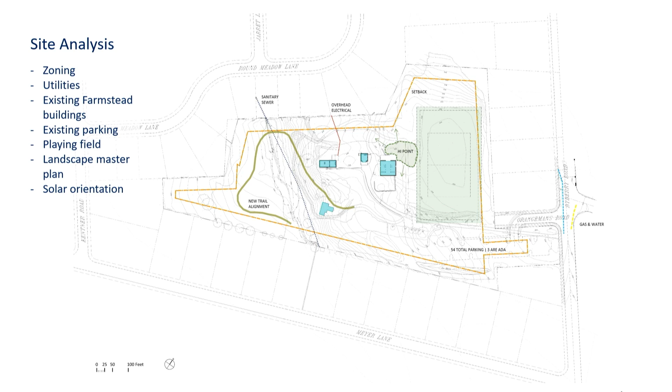The barn is in fair to good condition and can be made usable for flexible programming space. It would, however, require fairly intensive effort to make it fully conditioned and fit out for highly programmed uses. It would also require sensitivity in the fit out so the character is not lost or undermined. So we pose the question: how do we bring the barn online for recreational and community use in a way that works with the project goals and within a reasonable budget?

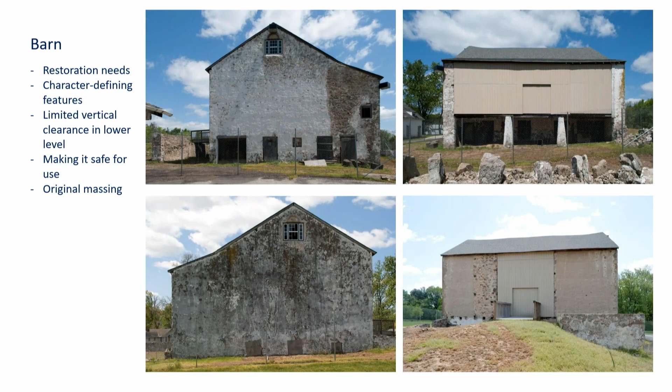The prior removal of what we're calling the north bay of the barn, this section here, means that section of the building is no longer there right now. This provides an interesting opportunity to link the barn with the new construction and to focus on cost-effective and energy-efficient new construction.

Reinterpreting the shape and floor plate of the north bay on two levels will provide approximately 1,600 square feet of new program space and create a sympathetic and compatible design to link the building to new construction.

So the preservation approach is: the barn is very well suited to supplemental community space. Maintaining its historic relationship to grade and the landscape is important to the character not only of the building, but of the whole property. Restoring the prior massing of the north bay, configured for adaptive reuse, will provide program-intensive space for new uses and new programs. It can be fully conditioned for year-round use.

The forebay on the south side of the barn and its relationship to the enclosed outdoor yard is well situated to connect programming both inside and outside the barn. And depending on access and availability to grants for historic buildings, the barn can be restored incrementally using grant opportunities specifically targeted for historic improvements.

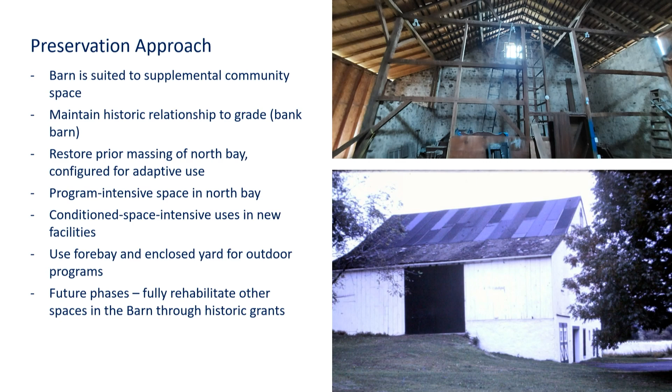As we began to look at siting a new large building on this property, we took cues from the organization of the historic farmstead buildings, with entrances at grade, the setback between the buildings, and the ensemble created between the buildings and the outdoor spaces in those relationships. Generally, the buildings have a perpendicular organization and the entrances face south.

We also want to be able to utilize the site circulation and the accessible parking. And we're also aware of new trail alignment, which will be coming online as part of the master plan.

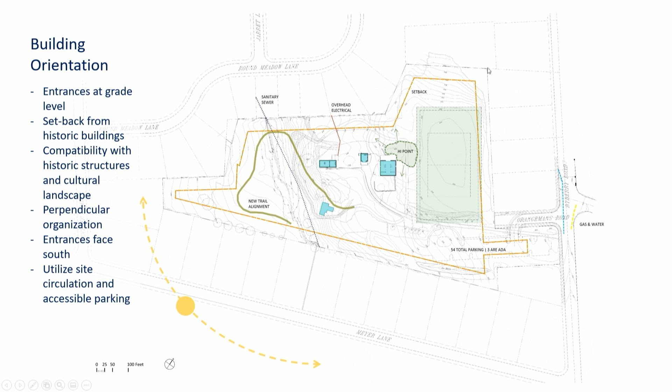So we started by looking at this shape that is approximately the size of a basketball court, first in the east-west orientation, set back. The orange line is the 40-foot setback from the property line.

We didn't pursue this too aggressively, and the reasons for that were: by positioning it within the setback, it begins to intrude on the historic core of the property and crowds the buildings. Also, because it's seated at the high point of the site, it eliminates the landscape relationship of what we call a bank barn. It doesn't work very well with the grades, which all slope down to the west, and the long wall runs parallel to neighboring properties and places unnecessary emphasis on the gymnasium building.

If we rotate that and also set it within the setbacks, it not only stays within the boundary of the setbacks, but also minimizes impact to neighbors.

After adding supporting space requirements to the gymnasium, the arrangement begins to create usable spaces between the buildings: between the gymnasium and the recreation facilities in the barn, between the carriage house and the forebay yard of the barn, and then a direct link to the farmhouse. It also organizes access to all the buildings from a common point located close to the existing parking and accessible parking spaces.

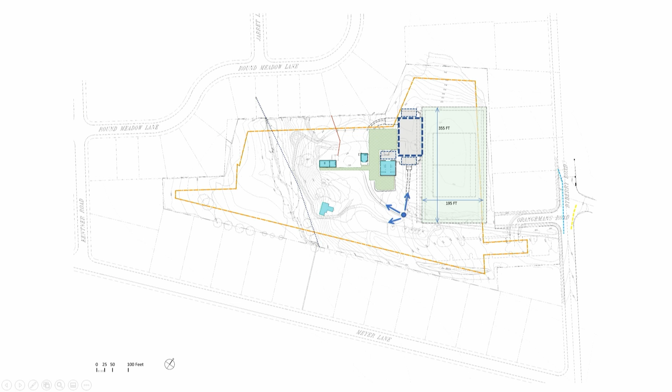The next few slides focus on the program, the uses of the space, their relationship and adjacencies, entrances to the building, massing, relationship of the floor levels to grade, and the heights of the buildings.

The full-size court, 50 feet by 94 feet, served by exits on all four corners, a service from the west, service and mechanical spaces located on the north side.

Linking to what we're calling the North Bay addition of the barn would be an infill building that would have locker and changing restroom facilities, first aid room. And then facing towards the historic properties could be a restroom that could be open even if the rest of the facility is closed to serve the historic property and activities going on.

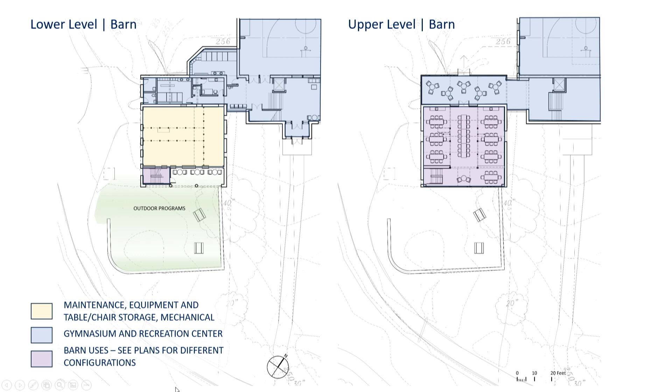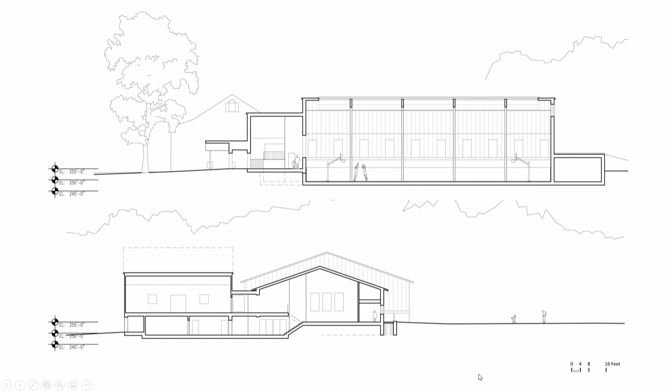Two more views cut through the main space of the barn, looking at the gymnasium. This would be the new construction portion of the barn. And you see here the low clearance that I was speaking of in the lower level. But you get this wonderful relationship of the landscape on the north side through to the program space, down through the forebay of the barn, and out to the outdoor programming space on the south side of the barn.

And then the last section view with the fields on the left, the gymnasium slightly lowered into the landscape, and the barn beyond.

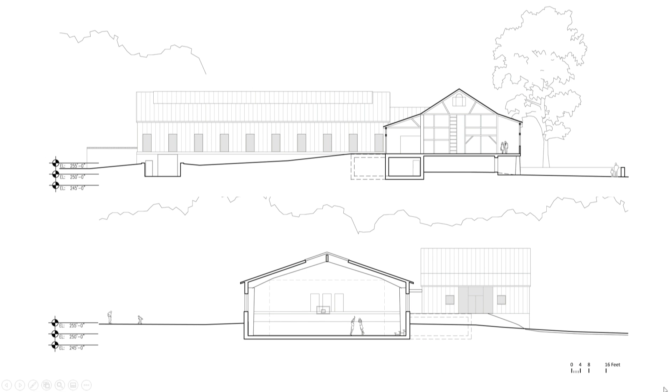And just a few three-dimensional views. Please keep in mind, this is just a study. These are massing models. These are not designs or meant to show exactly how the building would look. But you can see the focus is on trying to create the ensemble of spaces that respects the historic core of the building and makes the large building fit in with the overall scale.

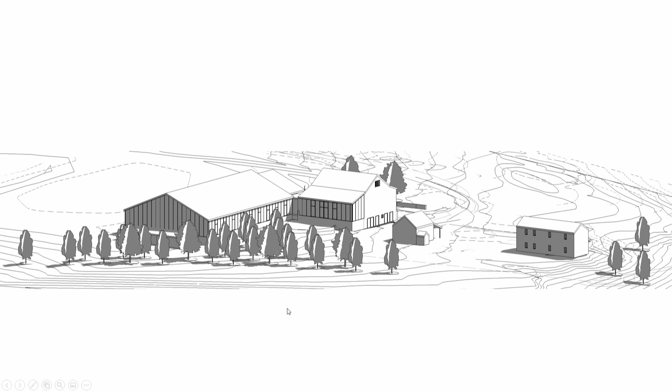Similarly, with the budget, we deferred to the methodology that was used for a similar study, and started with the square foot unit cost for the recreation facility that was used for the Woodlawn Park Master Plan report. But since there have been a great deal of changes with construction costs, the economy, availability of materials, we've really seen prices escalate. I'm sure you're all aware.

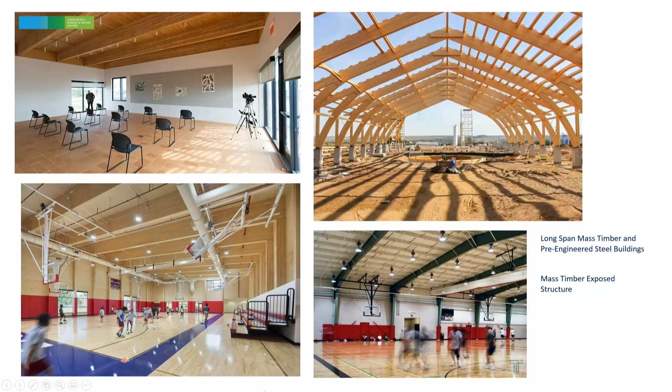Also, in looking at long span options, steel is always an option. However, availability and costs for steel have been pretty volatile. So the other option of looking at wood long span, there's some very desirable aspects of using wood. Availability, cost has gone down, and just the character would be very fitting in this case.

Also looking at panelized wall construction, both opaque and translucent, transparent, to create that kind of scale and texture. One of the nice things about that type of construction is it combines everything in one panel, the insulation, the light, cladding, and could be very cost effective.

Thank you. Comment. Thank you, Claire.

Before we get into questions, if you have any, this report was meant to serve as informational for the Board of Commissioners should they decide in the near future or further down the road if a recreation facility is warranted. This would give you an option as to another possible location as compared to Woodlawn.

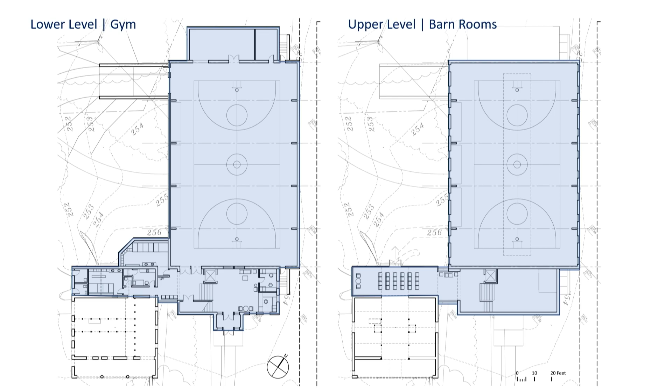That's phase one - everything from the south I would do as phase one. And then the gym, that whole thing, because that's just a double height gym space, there's nothing else to it. And the mechanical space to the north would be solely for the gym, mostly.

So you could isolate that entire facility. I just feel like a gym is a need the community has talked about for a long time, and we are going to have some community rooms at Woodlawn still probably, right? A smaller one - is that the plan, or?

No, not right now. Phase one of Woodlawn is everything except the building. But phase two is still planned to have a small building, is that right? Phase two is the complete rec center at this point. We haven't scaled that back, but it's certainly something we can discuss.

I don't mean to put you on the spot, especially with a math problem, but if you took the idea about drawing that line across and having that be phase one, what would be a rough estimate based on these numbers? Is there a way of calculating that within a million dollars? If it's like $2 or $3 million, because the whole thing's like $10 million on the high end - well, $10.7 million. If you did that first phase, are we looking at $2 or $3 million?

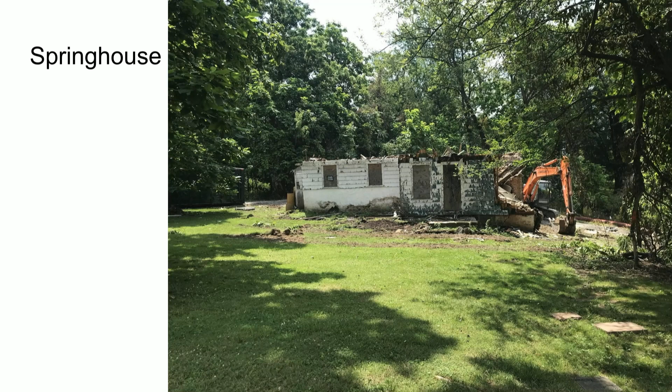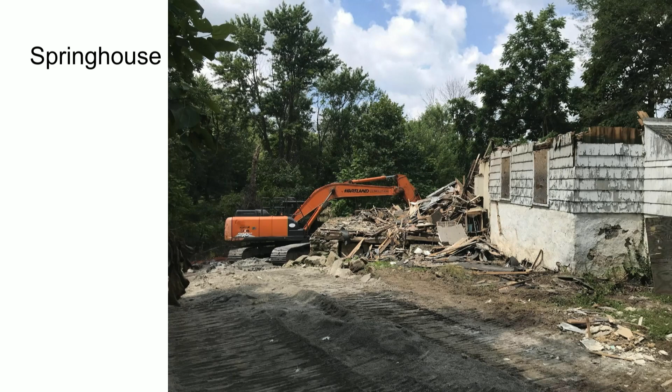If you're not used to this, the plastered section on the left-hand side is the walls of the spring house, which will remain. It took them about a week. The only problem was they found a gigantic beehive inside one of the walls that was persistent the entire time. At one point the grappling hook on the cab was covered with them, and I don't know how the guy got out of there.

This is facing the west side, where the exterior entrance to the basement is, and this is what it looks like now. It's actually quite amazing that all the features inside the spring house are still in good condition. There are these pedestals that come out, and only one has been broken. For those who don't know, above that was where the galley kitchen used to stand, and the floor had caved in a couple years ago, and all the kitchen was inside the spring house.

Alan, can you leave that picture, can I make a comment? When I met with our insurance carrier, if you look at that picture, there's a brown piece of wood in the distance - that's an opening that is secured right now, a fence will be there. That is the opening where you can walk into it, and that opening will be secured so people don't walk into it. That's where the original door is on the left-hand side, and there was a window to the right of it. So we're going to end up having to build that wall back up eventually.

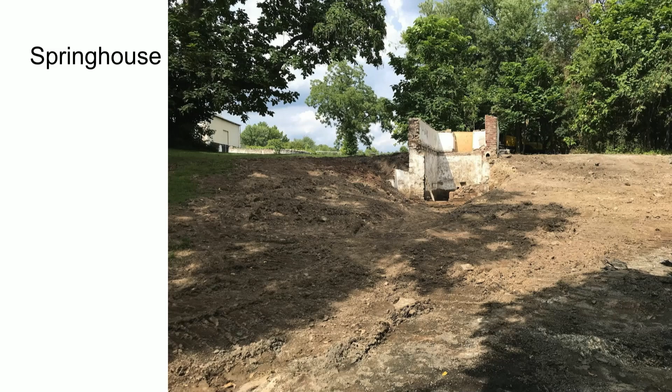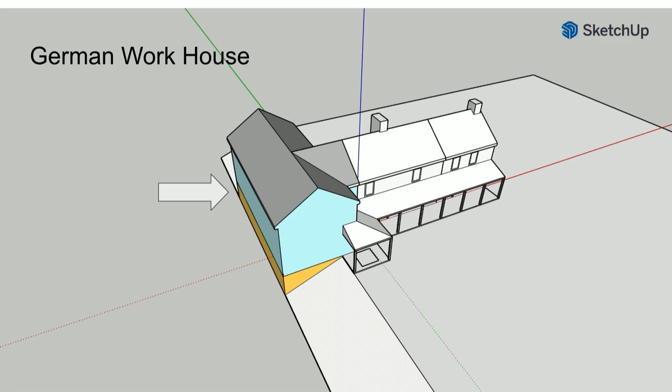Another angle. So right now we have the opportunity to say, hey, if we're going to hold off on the exterior roofing of the house, and if there's a chance we do something like this, it gives us the opportunity to take the pent roof off, put a nice pillared front porch, which is exactly what would happen. There's a wraparound that goes to a hand-dug well, and then you have three levels of open space with windows, heating and cooling, hand-hewed beams recreated just for the effect. There's actual German shiplap used to shore up the rafters in the house.

Evidence is still there. So, Alan, can I interrupt? One of the historical things about this building is the German part, because in the time period, I guess the 18th century, Germans had their barns as part of their house. Yeah, just, why waste a roof or whatever? It's a very, very common feature around here.

And we always wondered what that stone wall down there was for, and now we know. It was right before the Revolutionary War. This was one of the top producing farms in the area based on its taxation. The guy cranked out a lot of liquor and sold it to taverns. Anyways, that's what used to happen here.

So, yeah, I put the numbers together. A lot of it comes from actual quotes. Some of it I extrapolated based on square footage for what it would take to repair masonry. We have holes to fill in the farmhouse once we get the kitchen addition down. There's a 1970s louvered window, for example, that needs to come out, and stone needs to go in, then plastered. So there's a lot of work that still needs to be done on these structures.

So yeah, I mean, that's essentially it as far as the report. Do you have any questions so far?

So this was extremely helpful, and it's great to see it as a total of the entire facility, and then a breakdown of scope per building. So thank you for that.